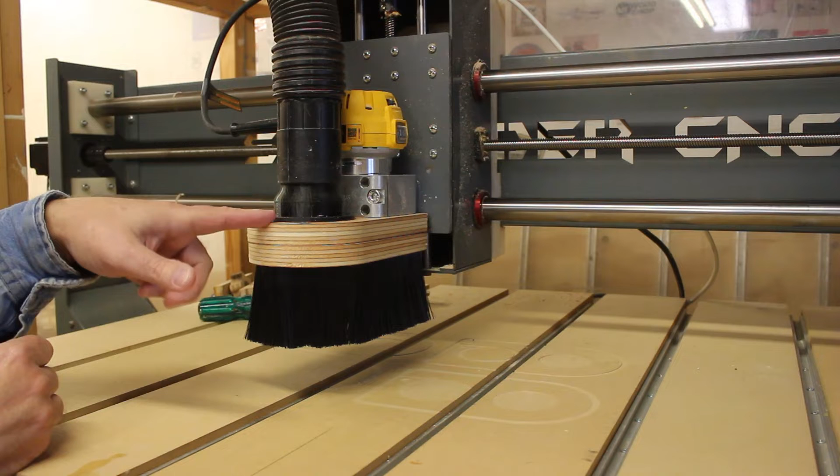I finished up my dust collection for this little Sidewinder CNC. I've got kind of a DIY dust shoe here, and I'm using a Craftsman 6 horsepower 16 gallon shop vac going through my top hat separator, which I'll show you here in just a second. But this is working pretty good.

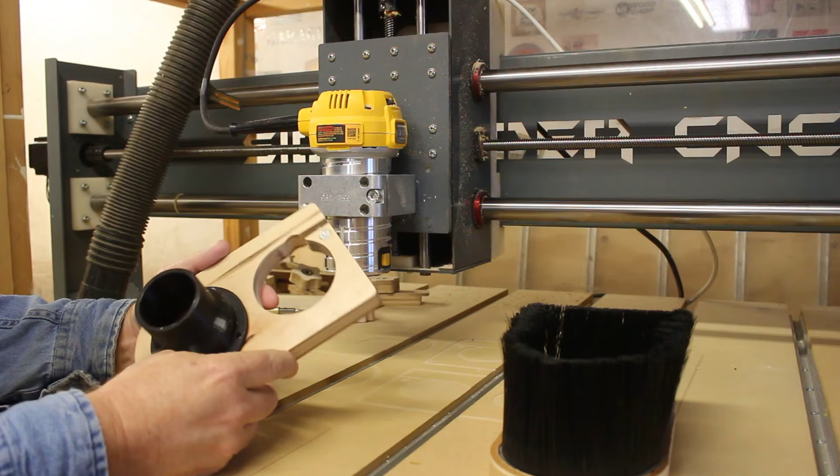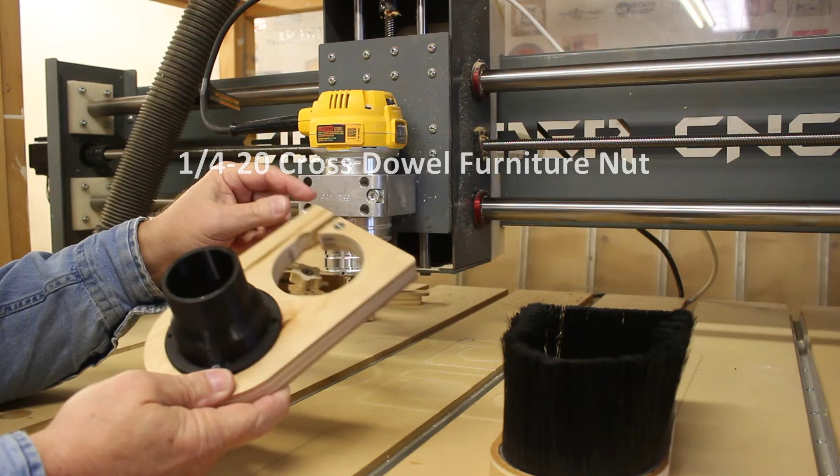But let me get this thing off of here and let's take a look at it. Okay, this is the top part here. I've just got a 69 millimeter hole cut here. In fact, I've almost got this one too snug because it's really kind of hard to get on and off. But once you get it on, this part's going to stay on anyway. So I do have a little threaded insert here with a bolt that I can kind of snug it up as well. But it really fits on snug the way it is.

On the bottom side, I've got a couple of holes here, or little pockets. You can see I have some bottle caps currently. I couldn't find any washers that size that I was looking for, so I found these bottle caps, and I tried that and it seemed to hold pretty good. But I may end up replacing these with some washers.

And then for the hole here, this is a 2 1/4 hole, and I 3D printed a couple of these mounting flanges, and you can see that this is really a snug fit, so it has a good seal on it. The other one I put on top of the top hat separator over there, and I'll show you that in just a second. So this piece goes on, and again, like I said, it fits really tight, and then I'll tighten this down just to kind of snug it up.

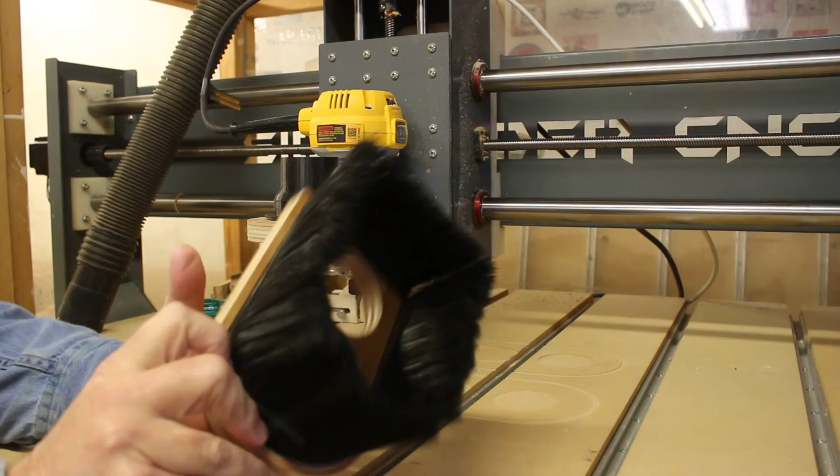So that'll hold that. And then this piece, I have a groove that I'll be showing you in the VCarve file. I have a groove cut here, and then I just press this in. This was actually on another dust shoe that I'm no longer using, so I was able to pull that material out since I didn't glue it in. It's just a press fit into that groove. And then I just trimmed it up to fit this smaller size, and it worked fine.

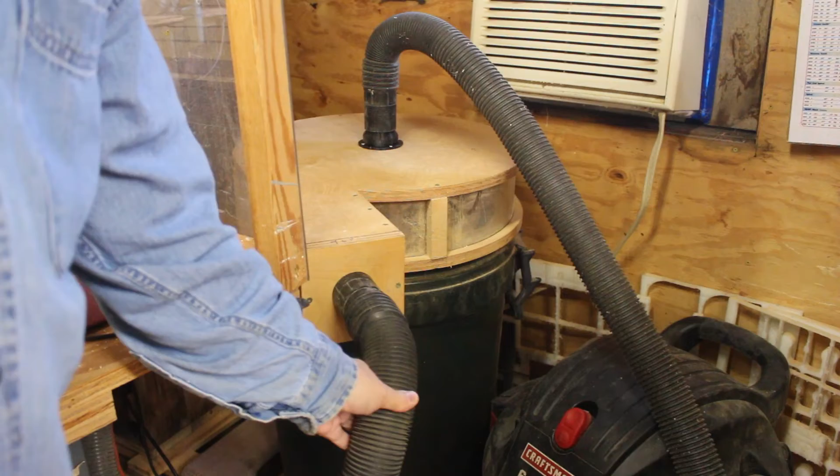Let me move the camera around and I'll show you that. You can see here this hose goes from here over to the front of the top hat separator. Okay, so that hose coming around from the top goes right here into the front of this top hat separator. Again, just a friction fit. And then the other 3D printed flange that I did goes on top of the top hat separator, and then that hose goes down to the Craftsman 6 horsepower 16 gallon shop vac that I'm using.

Okay, let's take a look at the drawing that I created for this. Here is the VCarve Pro drawing. This up here on the top is the bottom view of the top piece. There's the .406 hole for the cross dowel furniture nut. There's the 69 millimeter hole that'll go around your router. Up here, you'll have to turn it on its side and manually drill a hole for the 1/4-20 bolt to tighten it up.

And just a little tip, if you make this out of plywood, don't try to start off with a 1/4 inch bit and drill this through. You're going to bust up the edge of the plywood. You always want to start with a really small bit, maybe a .090 or something like that, 3/32. Drill it through the center and then just keep going larger and larger with your bit until you get a hole. If you try to drill that with a 1/4 inch bit, it'll just get all torn up and won't look good. So start off small and just gradually go bigger.

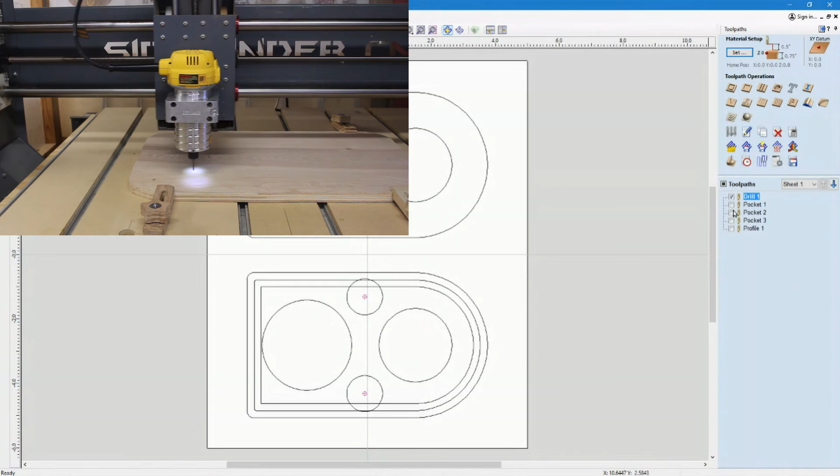Okay, let's come take a look at the tool paths. As I mentioned, I use a 1/8 inch bit. This little drill, the first tool path, again is just doing a little tick mark. In fact, I've got it going down just 60 thousandths is all it's doing. That's just to mark that so that I can drill and get my location on the other side of that part. Okay, the second program is for the groove. It's also using that 1/8 inch bit. So I saved these as a program where these two tool paths are the first run and then the other three are the second run because I use a different bit.

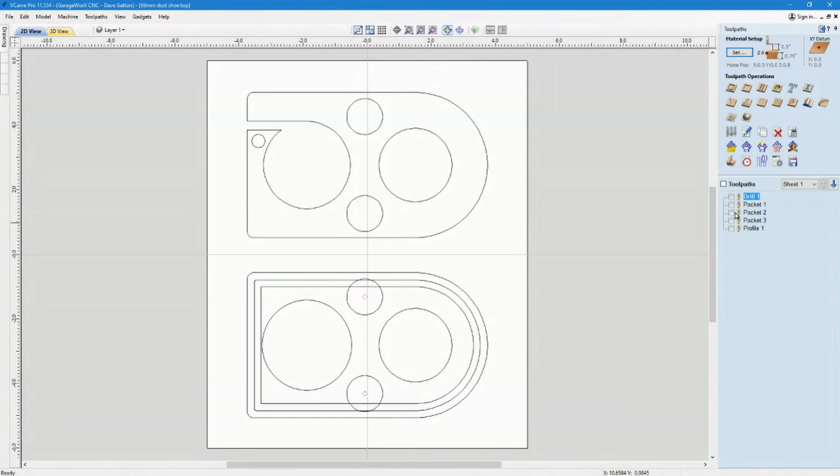If I turn those off, you can see this one is doing this pocket for either washers, bottle caps, magnets, whatever you want to use there. This one right here, you could run a profile path here if you wanted to. I like to go ahead and get rid of that material. It takes longer to run, but I'm only making one of these, so it doesn't matter how long it takes. So I use a pocket tool path to get rid of all that material.

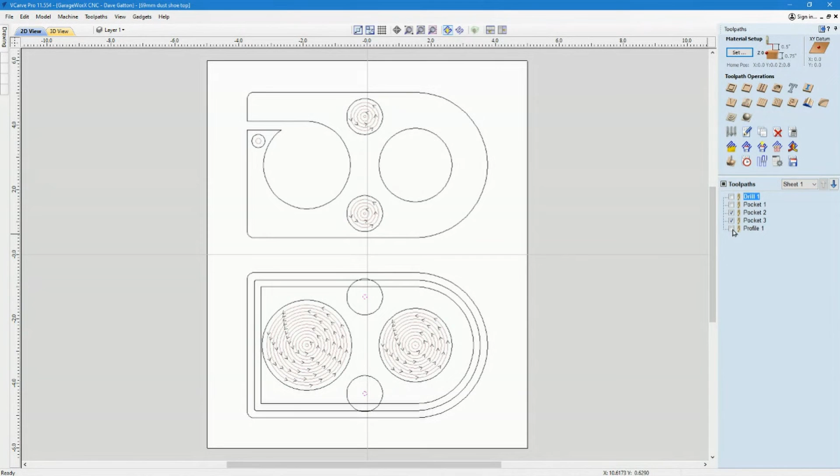And then the profile, you can see how this goes in here and gets rid of this. So you will have a hockey puck here that may come flying out at you. So you might want to use tabs. I used a down cut bit. So I didn't use any tabs to hold it down. Using a down cut, the chips from the material just pack in there and hold that down. But if you're using an upcut bit, for sure you'll want to put some tabs or something on here.

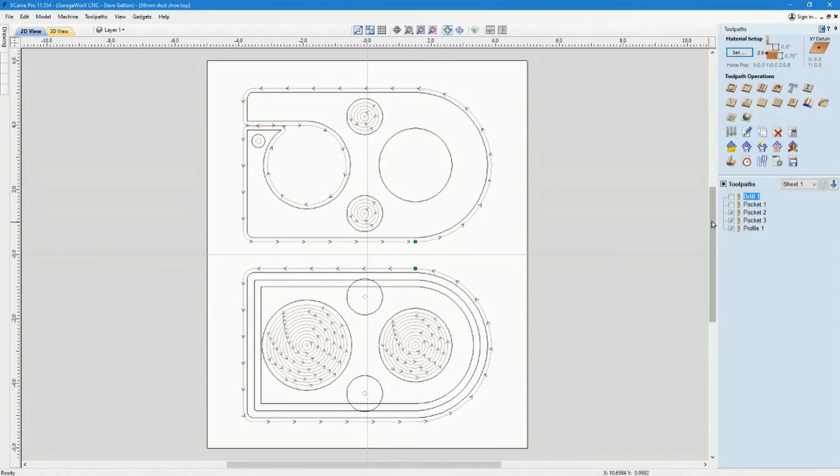Now, I'm not going to provide the tool path. I never recommend anybody use the tool path from somebody else. I'm going to provide this in an SVG, and you can put your own tool path on because your machine is not going to be the same as my machine. So you always want to use your own tool path. But I'm just wanting to show you how these work, the way I did it, so you can kind of understand it.

So here again, when you get done, you'll see that this piece does not have that pocket for the magnet here. And again, I just took a small drill bit, drilled through here on both sides, went all the way through, and then that way I could use a spade bit on the other side to create the pocket for the magnets.